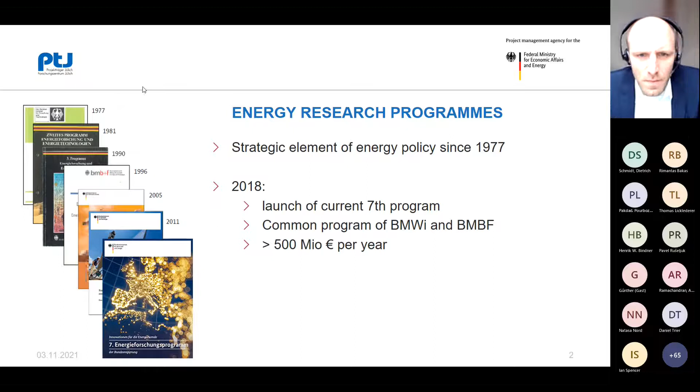One primary goal of our research funding is to support the transition to climate neutral energy supply. This is one of the main political goals. We try to achieve this by increasing the usability of innovative energy technologies, because we know many of the technologies we need for a climate neutral energy supply already exist, but we don't always know which concepts we have to use to apply them.

So we do research on technologies because we can improve them all the time, and we also do research on concepts to offer significant increases in efficiency, as well as integration of renewable energies. We have a very high level of security of supply in Germany, and we aim to ensure this high level also in the future. Together we aim for a rapid transfer of results into application and into the market. Remember, we work for the Ministry for Economic Affairs and Energy.

The key idea of our program is a technology-open approach. The ministry does not set which technology has to be used; all together they have to meet Germany's climate goals. We try to adopt new trends like sector coupling and digitalization in the energy sector, and again, as the Ministry for Economic Affairs, we try to offer opportunities for innovative companies to go into the markets and build up new businesses.

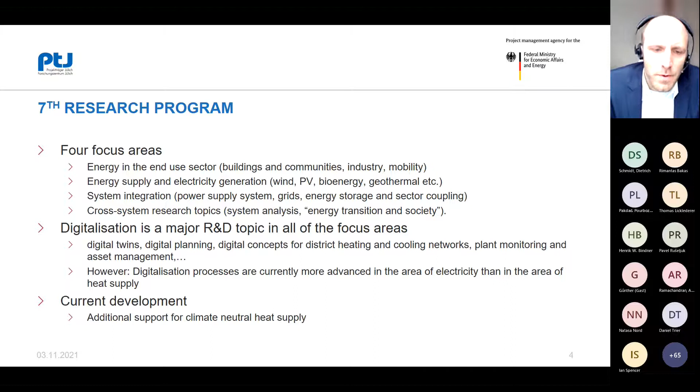We see a strong movement to put more money into research on climate neutral heat, combined with digitalization. We set up a call this year called KomTechE, to put more effort into this topic. In our technology-open program, we use calls to highlight special ideas of research, and we put this call with a special focus on utilization of communication technologies in the end-use sector - buildings, district heating, city districts, but also electrical networks.

We think the call was quite successful, with 39 proposals and a budget of 100 million euros. We were very happy to see that 75% of the partners came from industry, so we see there's a high demand for applying these communication digital technologies in the field. While the projects are running, they will be supported by a service project called National 5G Energy Hub.

We set up this project 5 years ago, and it offers a platform to all other projects with standardized interfaces for data collection and data processing, based mainly on 5G transfer technologies. This is how we support these projects and try to give digitalization in this energy sector a bit of a boost.

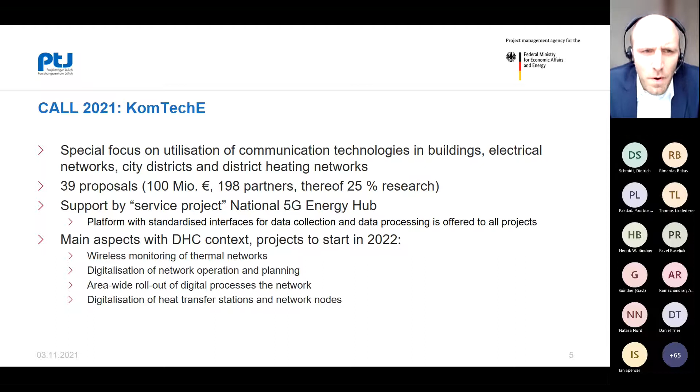One other very important idea of our research program is the new pillar we have there, which is the living labs. They focus on the transfer of technologies and innovation into daily life, preparing the markets for innovative solutions. We concentrate on the very relevant problems for the energy system, and we identify them in city districts and multi-energy infrastructure, in district heating, and in hydrogen production and hydrogen use.

Especially the first two aspects are highly connected with all digitalization aspects. With this new pillar, we improved also the funding options. We are now able to do investment grants for plant technology and infrastructure, so that projects are able to build up, for example, large heat pumps or additional heating networks, to demonstrate their new approach.

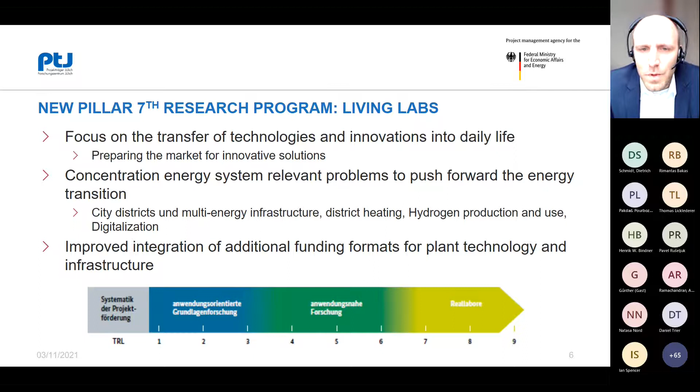We have roughly 100 million euros of funding per year for new projects, and very importantly, we have a systemic approach. We are socially embedded, so that we have a strong connection to the society, to the people who live and who are affected by the research. We try with our living labs to prove innovation at an industrial scale and in a real environment. Currently, we have 5 living labs in city districts tackling problems of renewable heat supply.

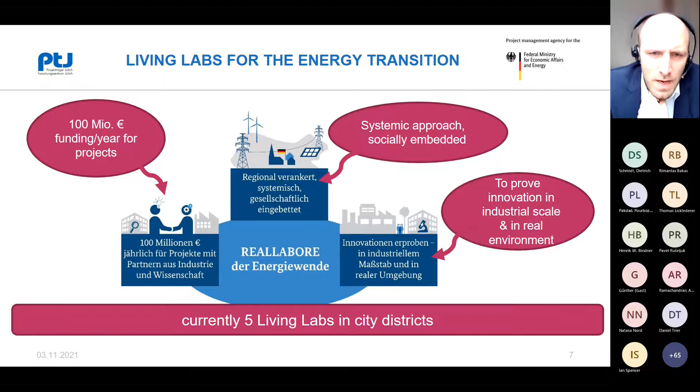In the short time available I will try to present 2 of them. One is the living lab TransUrban.NRW, which shall be a regulatory sandbox for the energy transition here in North Rhine-Westphalia.

In the former coal mining region here, we have lots of fossil-based district heating networks. The objective is to transform those networks, or some of them - it will be 5 networks - into low carbon supply systems. The partners want to introduce 5th generation networks, so energy systems with a climate friendly supply. All these networks and projects are supported by digital processes, digital monitoring, and cloud applications.

One partner is the company E.ON. They want to implement their Ectogrid technology in this network, and we think this project will show how high temperature energy infrastructure can be converted into a sustainable low temperature energy system. Our ministry puts 17 million euros into this project, which from our perspective is a pretty large amount.

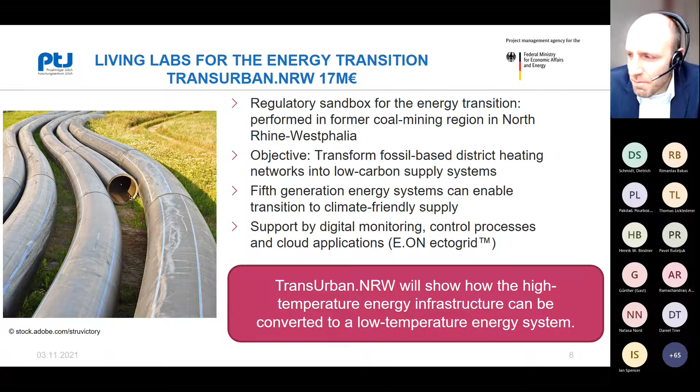The other project, which shall be known in context with digitalization, is the real laboratory, or living lab, called in English IW3, which is performed in Hamburg.

There we have the objective to combine renewable energy sources, storages, and prosumers in a multi-energy network, all in a very intelligent way. In the end, there will be a virtual power plant to regulate energy supply of districts, and especially distributed renewable feed-in, in an efficient way.

They try to use blockchain technology to operate and manage their system, to generate an energy market. In this project, we combine research and practical application in the real world, because there are hundreds of customers supplied by this network, and you do research in the real world in this project.

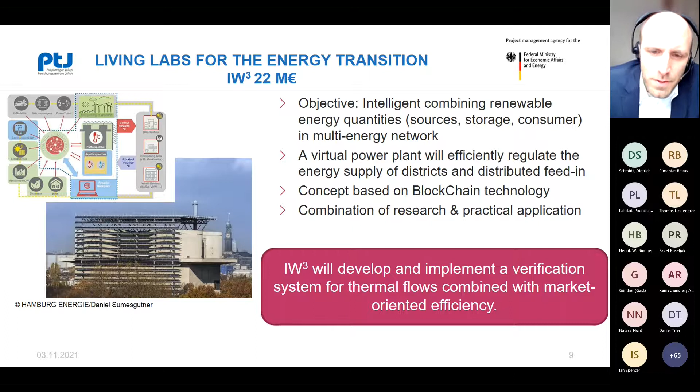This should be more or less the most important things from a German perspective. You shall remember that we have a very technology-open program for energy research in Germany, and we see digitalization as one key aspect across all focus areas. This is why it's not mentioned on the top level, but it's hidden in every single project.

Our research aims to demonstrate and apply all the new innovations in a real environment, so that we can prove these concepts and roll them out quickly. And what we call - I have no idea if there's an English translation - we call it Wärmewende, the part of the energy transition that focuses on heat supply. It becomes politically more and more important, not only from our perspective as a funding agency, but also for the ministry.

And I think this shall be a good point, because for our country, heat is what we say in German a 'sleeping giant.' I have no idea if there's an English expression for this, but there's lots of work to do in this area.

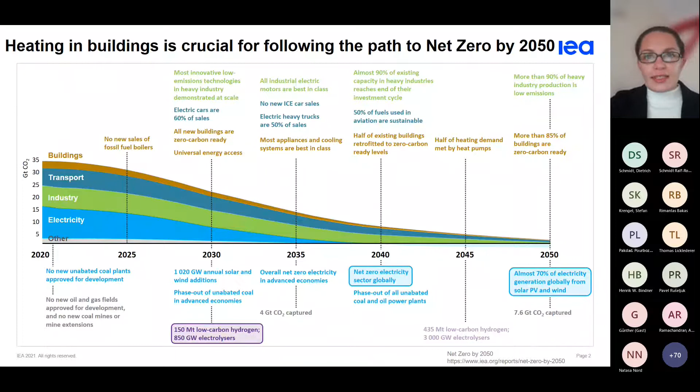Just one moment. It's all fine now. So in the IEA net zero emissions pathway by 2050, it is estimated that buildings floor area equivalent to that of the city of Paris will be added every week globally between 2020 and 2050. And 80% of this floor area will be coming from emerging markets and developing economies. In advanced economies, half of all existing buildings which we have today will still be standing by 2050. Therefore, energy efficiency improvements and decarbonization of both new and existing buildings are crucial to make it to net zero, which also requires that by 2050, we have more than 85% of buildings to be zero carbon ready.

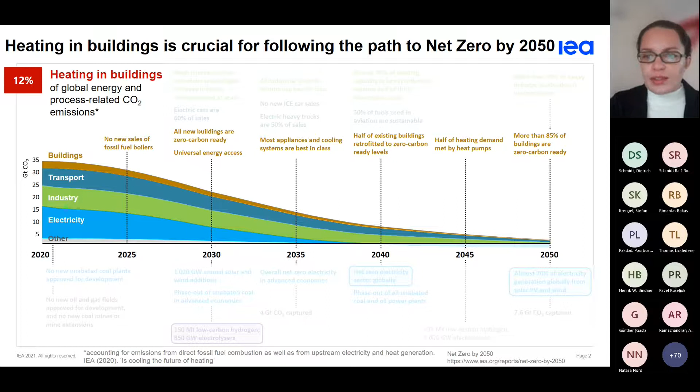Heating plays an important role in this process, as already about 12% of global energy-related CO2 emissions can be attributed to heating in buildings. One of the most important ways to enhance energy efficiency and decarbonize buildings is to move away from utilizing fossil fuel-fired boilers and furnaces for water and space heating. This increases the need for compelling alternatives such as heat pumps, efficient and sustainable wood stoves, renewable energy technologies, and of course, low carbon district heating.

In this scenario, district energy networks are expected to remain significant by 2050, especially in regions with high heating needs and dense urban populations and existing gas or district heating networks. In order for them to contribute to achievement of the net zero emission goal, the networks should be made as efficient and as flexible as possible, with a high level of renewable energy integration and be supported by digitalization.

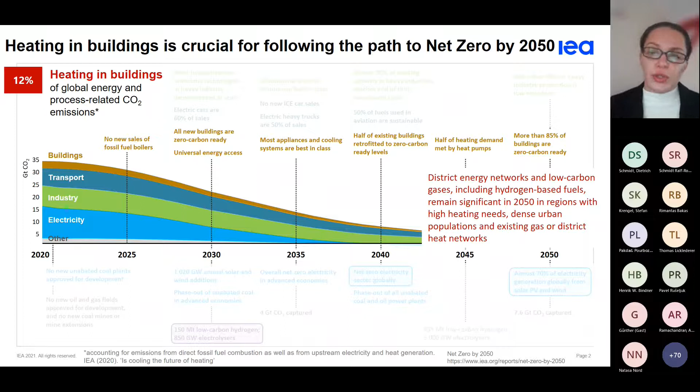The pathway toward zero carbon ready buildings requires that decarbonization of heating be accompanied by accelerated rates of deep renovation of existing buildings and high energy performance of new ones. It is estimated that a delay of 10 years in acceleration of retrofit rates would increase residential space heating energy demand by 25% and cooling demand by more than 20% by 2050.

That will put more strain on the power system and also result in an additional 15 exajoules of fossil fuel burned and emissions of 1 gigaton of CO2.

Moreover, energy efficient building envelopes can also be used as energy storage, using thermal mass in buildings, which can also offer more flexibility, manage heating demand peaks, and potentially incorporate more renewable energy into heating.

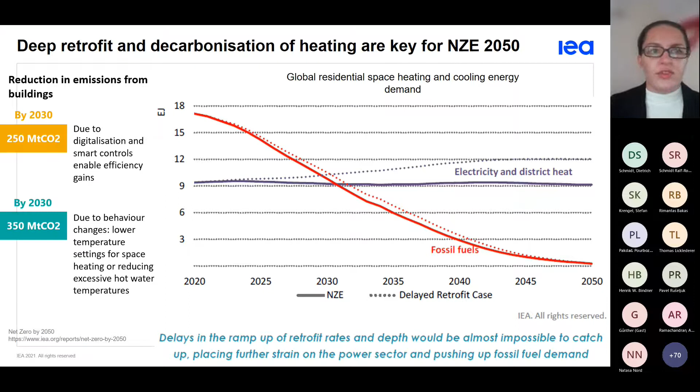Additionally, we estimate that reductions in emissions from buildings can come from behavior change, for example lowering the temperature setting for space heating or reducing excessive hot water temperature, as well as from digitalization and smart control, which enables further efficiency gains. As you can see, it's at the level of 250 megatons CO2 by 2030 already.

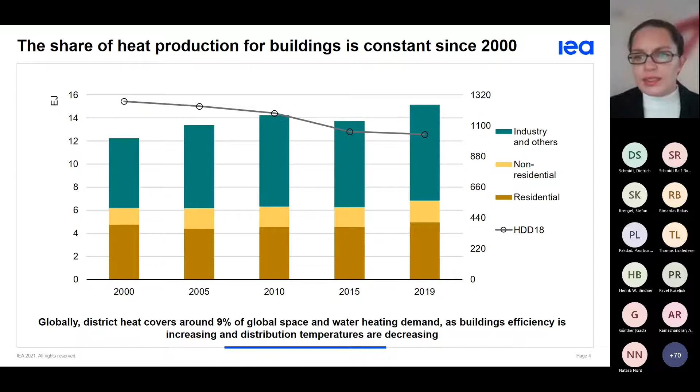As for district heating, it covers around 9% of global space and water heating demand as of 2019 data. However, about 90% of it still comes from fossil fuels, with a major role played by coal and gas. Integration of renewables is increasing, but as you can see, it's still relatively low.

In order for district heating to contribute to the transition towards net zero, further improvements should be made to decrease grid losses, increase efficiencies, and integrate more renewable energy. Digitalization can further help to utilize this potential by facilitating the shift towards modern district energy systems.

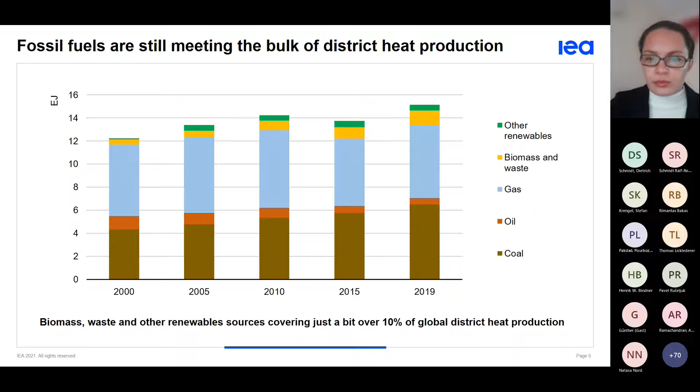Such systems will require that grid losses would decrease and the temperature of supply heat would inevitably decrease, while the same amount of energy output is produced and the same level of thermal comfort is maintained. At the same time, district energy systems are becoming more and more complex, integrating multiple technological elements.

In summary, the improved district energy systems for net zero emission pathways would need to be able to supply low temperature district heating for space heating and domestic hot water, distribute heat in networks with low grid losses, recycle heat from low temperature sources, integrate renewable heat particularly from solar and geothermal sources, be integrated into larger smart energy systems like electricity, gas, fluid, and thermal grids, and ensure sustainable planning, cost, and incentive structures which will encourage investments in such improved networks.

Digitalization can help accelerate this transition by providing the opportunity to gather and evaluate huge amounts of data, moving towards computer intelligence that allows real-time 24/7 decision-making in order to optimize the functioning of the whole energy system.

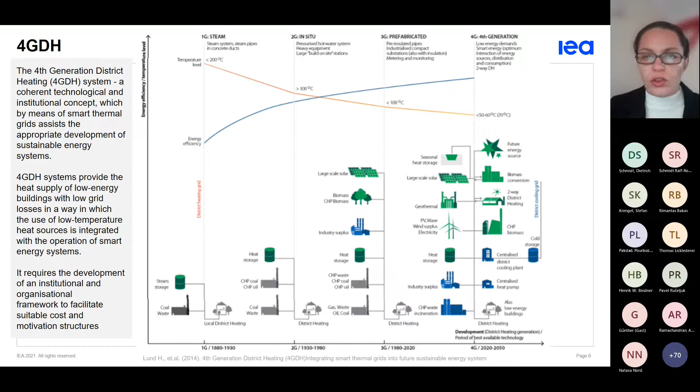In 2021, we're moving to a situation where the number of connected devices with automated controls is overtaking the number of people on the planet. Over the past 5 years, the deployment of such devices grew by around 33% per year and reached 9 billion this year, up from 7 billion just last year.

By 2024, it is anticipated that 83 billion connected devices and sensors will be creating large, diverse data sets on a wide range of topics, including among others energy consumption, air quality, traffic patterns, and so on and so forth.

We expect that artificial intelligence can help analyze the data in a meaningful way, for example to predict energy consumption for heat in buildings based on variations of behavior patterns and climatic conditions.

This data can be used to optimize heat supply and demand, regulate temperatures, flows, pressure, and storage availability within the network, and help shave the peak loads. Digitalization will also facilitate the integration of new energy sources, including waste heat and renewable electricity.

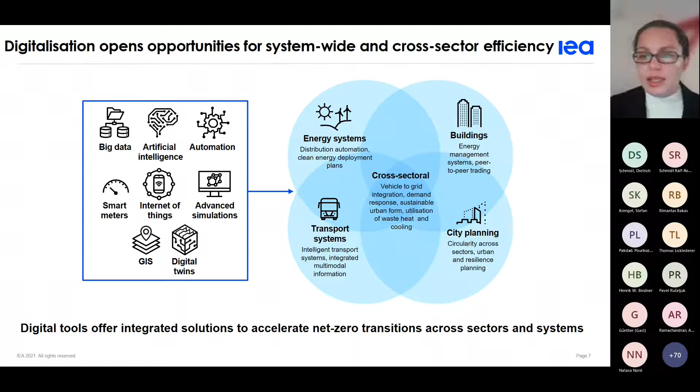Cities and municipalities should play a major role in creating a sustainable and energy efficient system. Digitalization can enable cities to create a range of distributed energy and flexibility platforms that can support the acceleration towards net zero emission goals. It is important to include cities and municipalities in long-term energy planning to make sure that municipal initiatives and national plans benefit from each other and don't hinder each other. Local stakeholders can often serve as efficient drivers for sustainable energy transition.

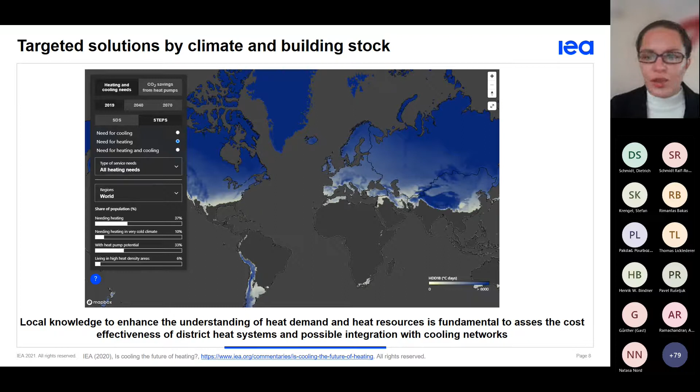We heard about 2 German living labs, which was very interesting. When I was thinking about what to talk about, I thought I would also mention a very interesting project, the Energy Lab Nordhavn project in Copenhagen, which I thought would be a good example. I'm sure some of you are familiar with it, but I had the pleasure to visit the project as I was living for 5 years in Copenhagen, not far from this district.

It's really a living lab which shows how a modern integrated energy system can be operated in a highly efficient and low carbon manner at the district level, but also potentially at the city level, because it's really like a city within the city. Among others, the project has demonstrated the possibilities for low and ultra-low district heating, utilization of large-scale heat pumps with smart controls for coupling electricity and heating, helping the electricity grid balance solar and wind power production, as well as, in some parts of the district, utilizing the thermal capacity of buildings to reduce peak loads.

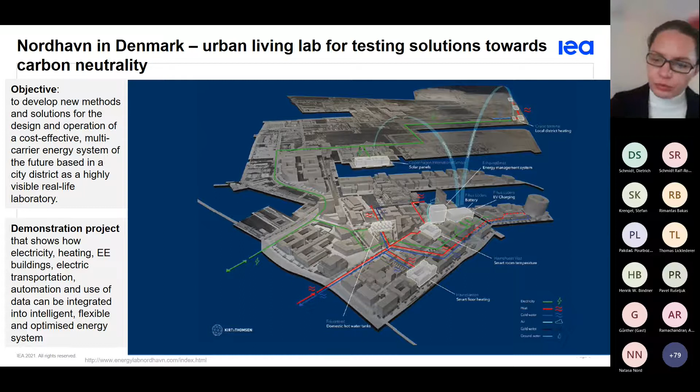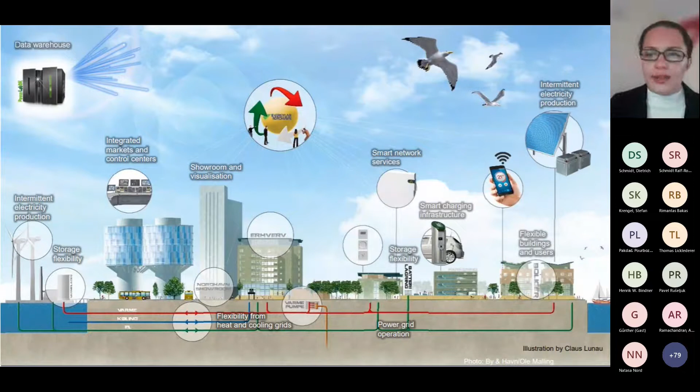Nordhavn has also demonstrated numerous opportunities and benefits of digitalization by connecting points of energy demand, supply, storage and management to a data warehouse, where data is collected through all these connection points and analyzed for further decision-making, adjustments, and communication to different users and producers of energy. This project has already demonstrated the potential for a flexible, integrated, efficient, and low-carbon energy system, which contributes greatly to Copenhagen's ambition to become a carbon-neutral city by 2025.

Coming to conclusions, the energy system needs to undergo substantial transformation to follow a net zero energy pathway, and flexibility of the energy system is very much needed, also to encourage the active participation of consumers and prosumers. Digitalization will be key to this process, and of course we need to work on creating enabling policies for effective digitalization of energy systems. IEA is providing guidance to policymakers in this area, mainly on the electricity side, through the digital demand-driven electricity network initiative.

I will conclude by highlighting 6 high-level policy recommendations for national policymakers, but also engaging different levels of government, specifically placing a lot of focus on city planning, which you can also find in the recent report on empowering cities. These recommendations cut across policy development, building capacity on digitalization and decarbonization of the energy system, ensuring open and transparent access to data, availability of finance and supporting financial innovation, utilization of international standards and best practices, and of course creating opportunities for sharing, learning and collaboration among different cities, countries and experts.

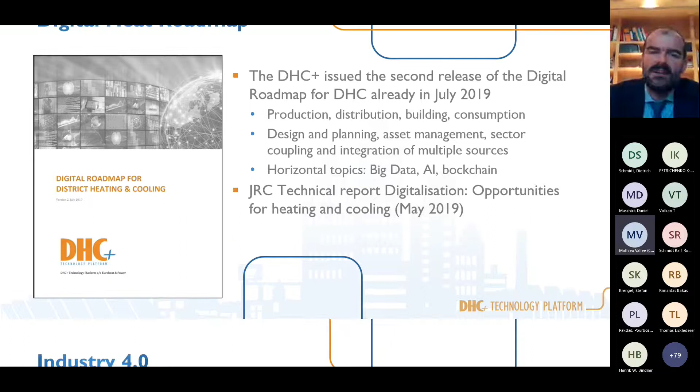In fact, this builds on the shoulders of giants, which I would call Industry 4.0. The initiative started at the beginning of the last decade, where a comprehensive transformation of the whole sphere of industrial production through the merging of digital technology and the internet with conventional industry came up as a real revolution, focused in principle on the manufacturing sector, but which aimed at smart grids as a key focus area from the very beginning.

It was interesting to see that remark by Stefan before, when he said that electricity is still leading on digitalization, possibly because Industry 4.0 was already addressing those issues more or less 10 years ago. But we are closing the gap, I think, very, very quickly.

Of course, Industry 4.0 has fueled lots of money in Europe, 100 billion to member states to make investments in digital innovation through the European Structural Investment Funds. And in fact, lots of interesting regulation promoting digital innovation, research and development, with loans, tax credits, and funding, which have changed the culture. I always quote Paul Voss, who said that just a couple of years ago digitalization seemed a specialist issue. Now it is a cross-cutting topic that every area has to deal with, as my colleagues addressed before.

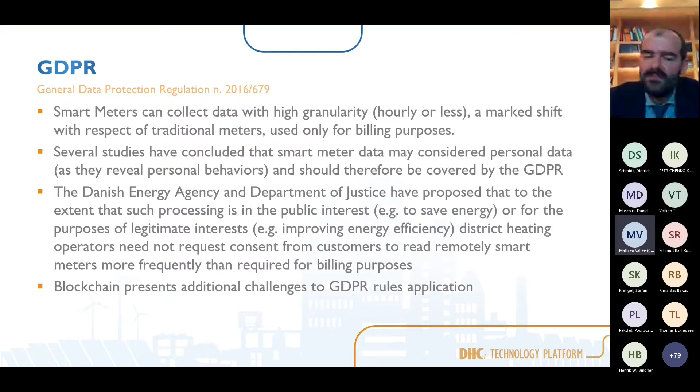So many controversial or important things going on that look and deep dive into the regulatory and policy arena. But at the same time, the EU is also providing means to try and meet the challenges through funding.

Let me mention a couple of them quickly. Within Horizon Europe, the partnerships are the means to bring the public and private sectors together to face pressing challenges. Let me mention the key digital technology partnership, which aims to strengthen electronic value chains to ensure EU technological sovereignty in global competition, which seems very much focused on electronic providers, but given the links with sustainability policy and smart networks, it means that district heating and cooling networks are indeed a very attractive research area due to the potential for decarbonization and uptake of cutting-edge digital technologies.

There is a significant amount of money being allocated to this, and the first calls are expected very soon in the coming months. Another partnership worth mentioning is the one on smart networks and services, which aims to strengthen Europe's scientific and industrial leadership with respect to the Sustainable Development Goals from the UN. And again, there is significant funding, which of course needs to be matched by the private sector.